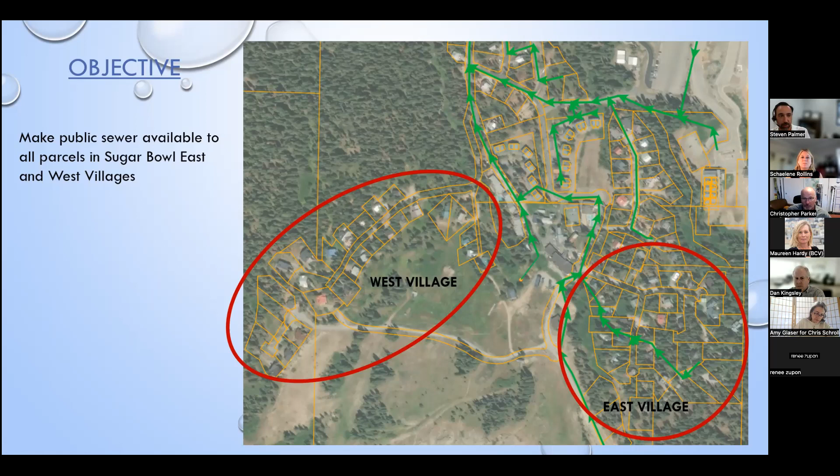And so my talk about project need: why are we doing this, and why are we doing it now?

Back in 2009, LAFCO approved the annexation of these villages into the DSPUD, Donner Summit PUD service area, and we were providing water service at that point in time.

Steve, can you define LAFCO for people watching? Sure. LAFCO is a Local Agency Formation Commission. They're the ones that review and approve it when someone wants to annex projects into different public utility districts for utilities, or into cities, for example. So anytime there's multiple jurisdictions or public agencies involved in project approvals, they get involved in deciding if the project's allowed to annex into, say, the PUD or into a city.

So they had to approve that at the time, because as Chris was saying, Sugar Bowl didn't provide water anymore. They ceded that over to the DSPUD back in '89, so a while before 2009.

And so when these lots were developed and this project for East and West Village was developed and the subdivisions were put together through the county, they had to identify who's going to provide sewer and water service to it. At that point, DSPUD had water available right there, there were lines, it was easy to get to, so the project was annexed into DSPUD service area for water.

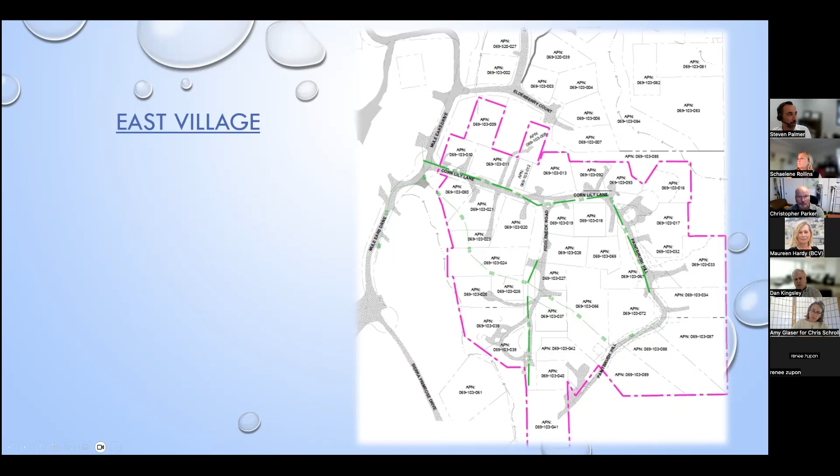In the East Village, we count 22 parcels that are not connected to our sewer system and don't have any kind of stub. So they don't have any sewer and don't have the ability at all to connect. And in the West Village, there's no sewer at all, as I said.

So we have these dark green lines showing how we get across the creek here, and then the trunk line splits up Penny Royal this way and then all the way up to the Astor Court back up here. That area is 25 parcels.

So that's the overall plan of what we're doing. You can see on this map the master plan - there are two real distinct areas that are very separated. That affects the project phasing and financing, and so for that purpose we're trying to get things constructed in a reasonable time frame and in a rational manner.

We're starting with what the engineer had called phase 2A. This master plan was done a few years back, before we really thought about which phase was going to go first. So they named these phases, and unfortunately the phasing doesn't quite match the order of what we're doing now, but we're sticking with the original phasing and naming for consistency's sake.

This West Village was phase 2 in that master plan, so we're splitting it up. This phase 2A piece would take from Old Donner Summit Road across the creek and up Penny Royal towards the south. That gets to the homeowners that are looking for sewer right now - they're the ones that need it by end of 2024. Phase 2B would take the line up Muellers and all the way up to Astor. So we'd want to build 2A first, and then do all of 2B at once.

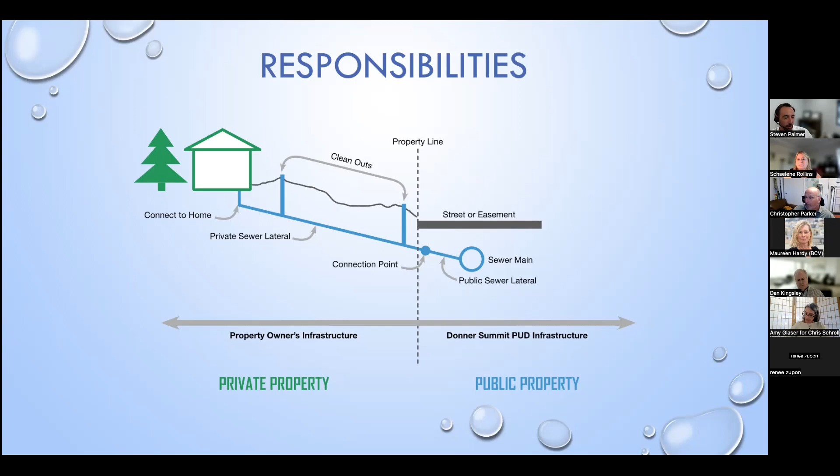So with that, I was just going to move on to what we're doing now, and then I have a couple slides about the financing and next steps. Right now we are under contract with an engineer, Auerbach Engineering, to design the public portion of the sewer. DSPUD is the lead agency for the public sewer portion, so we're putting together engineering documents and bid documents that'll go out to public bid, so we can select the lowest responsive bidder as required by public contract code.

Funding wise, the plan is to have this sewer funded by a property assessment. We have to do an assessment engineer's report that calculates the cost for each parcel, and that assessment will be placed on each parcel. You can pay it off lump sum, or we can put it as an annual property tax payment — that'll be the option of the property owner. There'll be a period of time where you can do either. We've also adopted a separate connection fee.

This property assessment has to be voted on by the property owners. If it doesn't get approved, this connection fee will give us a way to help pay back people who build sewer ahead of when we need it. It'll also give us some revenue to help build this first piece that these property owners need right away. So if we end up with both the assessment and the fee passing, there's a credit back to people paying the assessment, so they won't get double dipped — a connection fee will be credited to them.

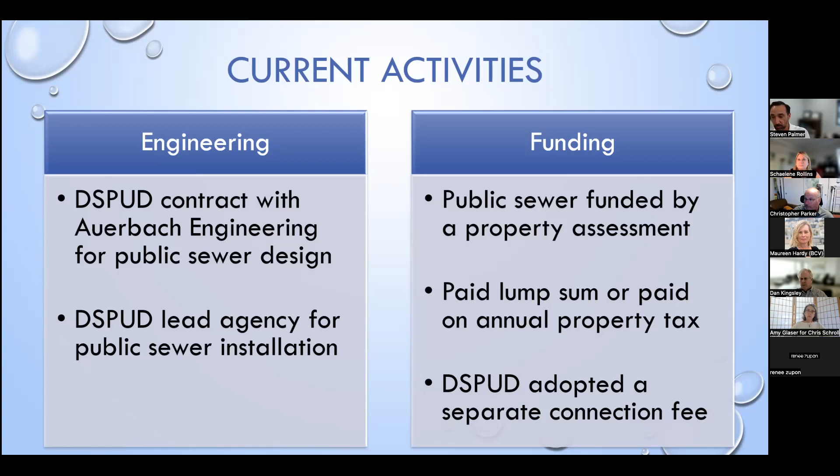Steve, could you just give us a review again of how all this ideally would work? Because you were saying if it doesn't get passed, the assessment's used to pay for it — I didn't follow that. Let's just assume that all property owners will say this makes sense.

So then there is an assessment that's put onto our property, like the property tax, and that pays the PUD back for the cost of the public improvements in the public right of way. But we're all obligated to pay for the work on our own property separately.

And then you say on top of all that, there's a connection fee we pay to the PUD. Yeah, essentially I'll restate it: there's the piece that everybody's got to pay for their own private connection — between the house and the street, you got to pay for that, and any connection fee you have to pay that too. And then the piece that's in the street they're building, we need that as an assessment on each individual parcel that you can pay up front, or we can put it on the tax bill.

And the way the assessment piece works, at least, is that say we pass the engineer's report — it tells us how much it's going to cost and calculates an assessment per parcel. That tells everybody what their piece is of the public sewer that's out in the street. But that doesn't give us any money, so then you guys, the property owners, can pay up front. A percentage of people will give us the money — usually I've seen it like 10% or so will pay up front.

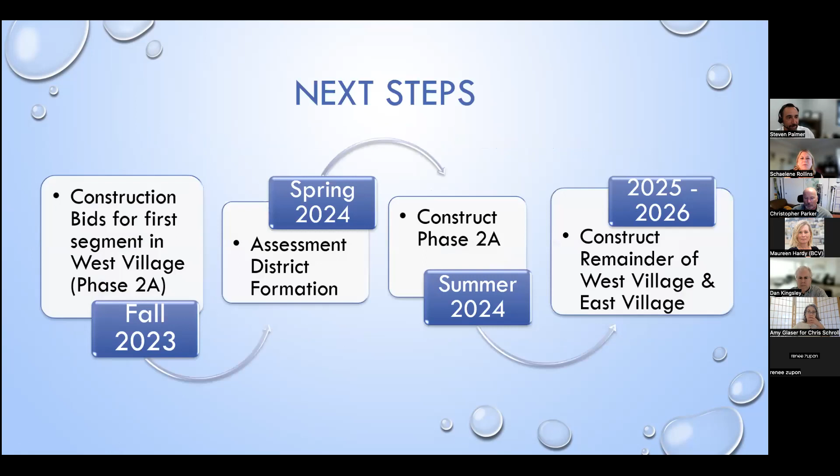And that is it. So if you have any questions, I don't know if you want to just shout them out. There's not that many in here, I don't think. So I don't know how you want to do it, Steve, Schaelene. Steve, one quick thing that came up on the chat - can we ballpark the cost per homeowner? We have no sense of scale.

So yeah, I can, because we just adopted this fee that's supposed to do the same thing as this assessment essentially, which is provide some revenue source to pay for the construction. And that estimate was about $950,000 for the East Village and $1.6 million for the West Village, not including any financing costs - so that's just the construction costs, engineering costs, that kind of stuff. And we are breaking the fee up so it's different per each village, and this would be the assessment too. Each village would be different because they're so standalone, and they don't really interconnect within the scope of the district, or the assessment district.

They don't connect, we're bifurcating them as two different assessments or fees. And so for the East Village, we're looking at ballpark $43,000 per lot, and West Village we're looking at $64,000 per lot. Of course, that is just based on our planning level cost estimates and what we know today, but that's what we're looking at at this point.

And so if we were to elect to have this put on our property tax and essentially paid over time, like a normal municipal assessment, what period of time is it amortized over? Is it 30 years? I think it's 30 years. Okay, I mean it could be as short as 20, but until I talk more with the bond people, then I don't know.

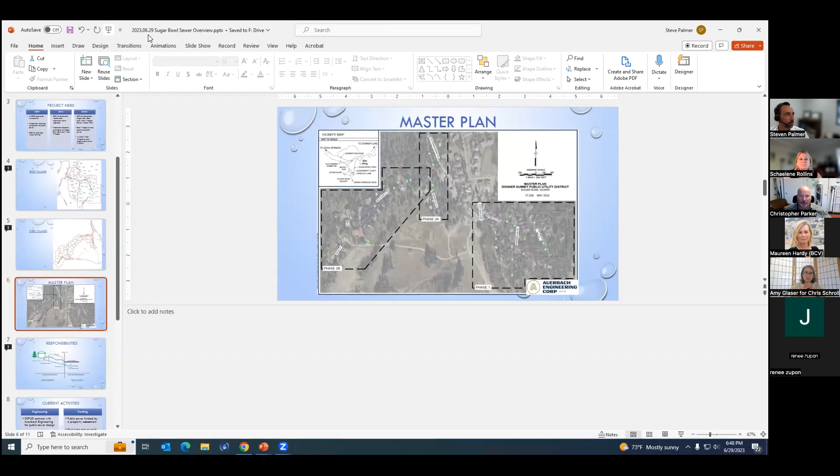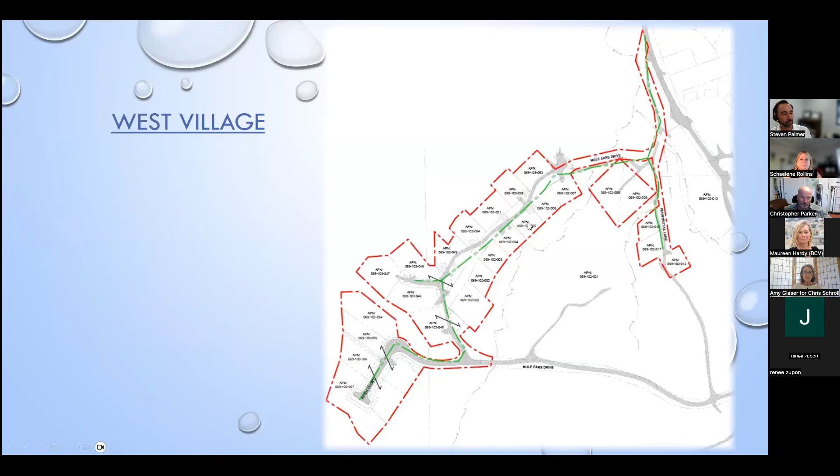Okay Steve, there was a slide you showed earlier that had the outlines of phase 2A, 2B, et cetera, and it looked like there were some overlaps. Yeah, I'll bring it up again, but the overlaps really are just because we used a big pen basically, it's just kind of to draw delineation. I can bring it back up, I think I need to switch. And Maureen, there were some changes to how far 2A extended, and it is pertinent to the project you're working on. So it wasn't this one, it was the next one that had the phases. Yeah, this one has the phases on it.

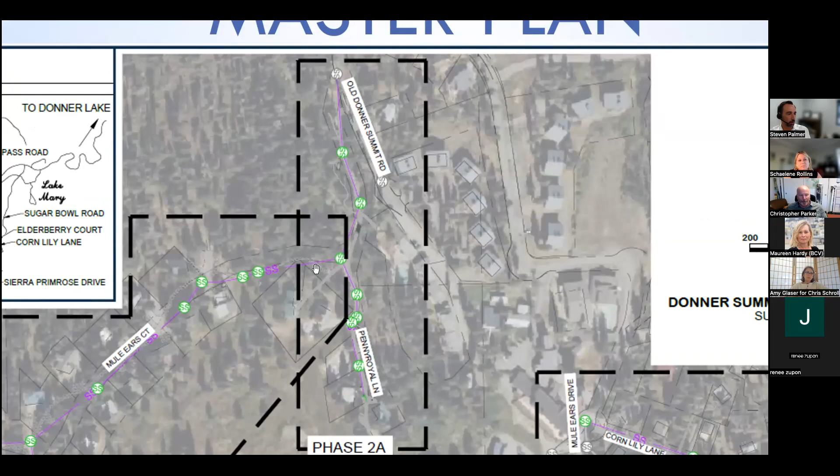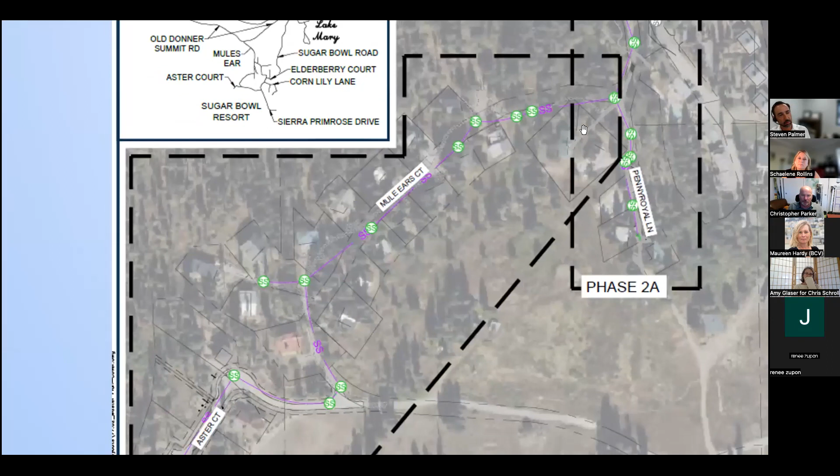What Chris alluded to is that phase 2A is going to follow this alignment here and then extend this way far enough to reach these two parcels that are here in that area, in phase 2A. Yeah, that'll be 2A. But then 2B goes all the way over, it'll go all the way up this intersection. And that is describing just like where the start of that lateral is, even though there's some service to a couple of parcels in 2A. Where the overlap is happening, the 2A is showing that there's a lateral serving two parcels, and then 2B is capturing like where the lateral starts for the whole rest of Mule Ears.

Maybe. I wouldn't pay attention to the black lines in here really, that's not the hard delineation between 2A and 2B. It was really just for graphically, as they're working on engineering plans. We've delineated right here, and this black line right here is going to be the end of 2A, there'll be a manhole there, and then from here up will be 2B. So the 2A will include the laterals to these two parcels, and that's it. I ask because that's the area of overlap, that's the area I'm interested in. So is it one of these two? Yeah, we talked about it with Chris last week and came up with some design modifications to make sure that we provided service to these two. Got it. Yep.

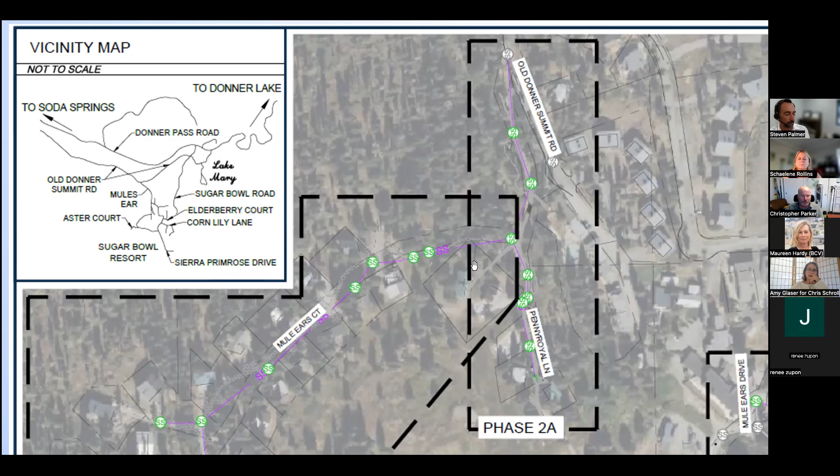Okay. Anything else?

What is the timing of the payments, just so we can intelligently budget for that? We're looking at the assessment district with final engineering done in January, February of 2024. That's when we'll know the final numbers and be ready to issue the ballots. So it'd be spring 2024 when we have that number calculated and people can pay the assessment if they wanted to.

Do you have an idea of ballpark numbers at this point in time? Any ranges or anything? For the assessment, yeah. What do you anticipate it's going to be, roughly? Not a number we can hold you to, but at least a ballpark. Yeah, I think...

It's $43,000 per lot in the East Village, and then 64,000 per lot in the West Village. And that does not include any financing. So if there's financing involved, that would go up for those people that don't prepay it. If you prepay, that's the number as we know today. And if you end up putting it on your tax bill, it'll go up by whatever the financing costs are.